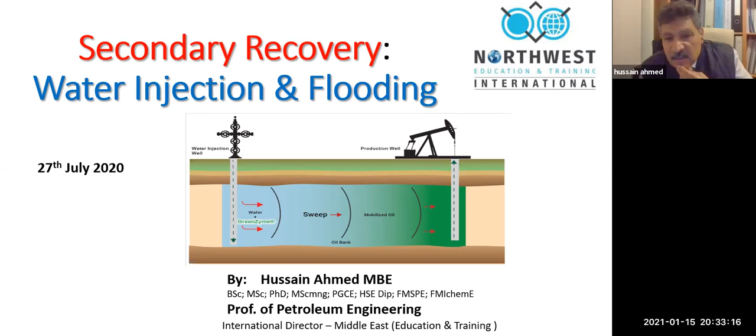Currently, I am also working as a director with a company based in Liverpool in the UK, in the northwest of England. We also do training and education for petroleum and oil companies.

In my agenda, I will cover the following topics: the difference between water injection and water flooding, what do they mean, and why do we need water injection? And if we know why, the next question is when can we do it, at what stage of the life of the field do I start? So when and why is important.

Then what's the economy behind it? Is it going to be expensive, costing money? Is it going to be more than the cost of oil itself? That's also going to be answered.

Then what are the major problems I could face in water injection or flooding, whether these problems could be surface problems or subsurface problems? What are they? I'm going to talk about some of them. I put today about 10 problems, and I'm going to talk about them.

Then we come to a conclusion and recommendations for any future projects on water injection. Hopefully I finish within 1 hour, then I leave the stage for you to keep asking me questions, the question and answer. So that's the plan or agenda for this master class, I call it master class, a free webinar.

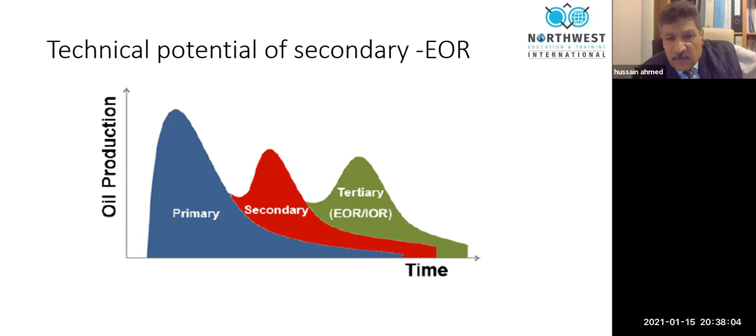So when do we do it? Usually, we do it in order to maintain the pressure we have lost from the reservoir. And also we do it because we want to get more oil production, because the water will help me in mobilizing the residual oil. I got oil. There's oil in the rocks, but the oil is stuck to the rocks, cannot move. So can I wash it? Can I displace it? The answer is yes. How do you do that? You do water injection. So that's an example.

Or there is also an oil which is not swept very well. The oil is a bit sticky. We call sometimes the oil wet reservoir or oil wettability reservoir, hydrocarbon wettability reservoir. A reservoir which likes and loves to keep the oil in it. I need to take the oil out of it. So water injection can help as well.

So these are the reasons. Pressure being dropped. I have not much pressure. I have not much production. I have oil that is not mobilized. I need to move it. I have oil which is stuck to the rocks. I need to wash it, to take it out.

So remember, these are the reasons. Pressure low. I have oil left behind. The oil is immobile. I want to make it mobile. The oil is sticky. I need to sweep it out. Sweep بالعربي يكنس.

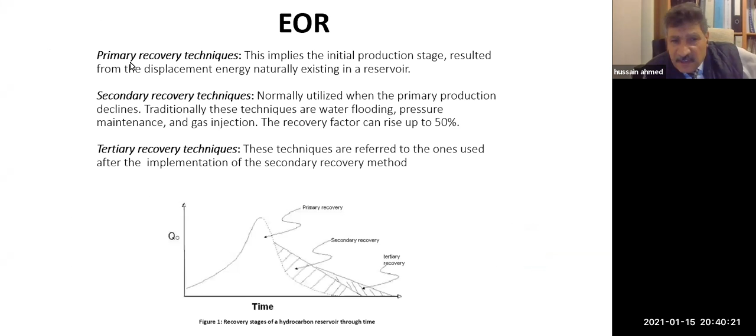So we have these three titles, as I said, primary, secondary, tertiary, and I will explain them. And secondary, already I mentioned what is secondary. Now, if somebody asks you, what is secondary recovery? Tell him it's a process that we use in order to increase productivity of oil reservoir. How? By increasing the pressure of the reservoir. How do you do it? By water injection. So that's the idea. Secondary recovery, water injection is one of them. So this is the answer I put here.

Why? Why? So the answer in a brown color. Pressure restoration and pressure maintenance. My asset, my bank account, my money is the pressure. If I lose the pressure from the reservoir, I will lose the production from the reservoir. If the pressure in the reservoir is very small, then I don't produce anything.

If the pressure in the reservoir is equal to PWF, the well flow pressure, then no oil will be produced naturally. I lose it. So pressure is very important to be maintained. If we lose it, then water injection is the answer by pressure restoration and also maintaining the pressure. So that's one of the aims, maintaining the pressure.

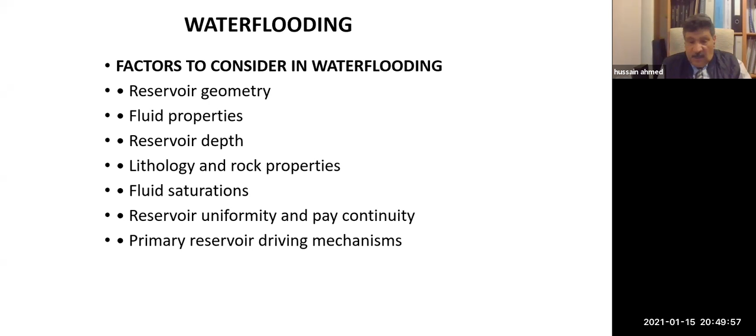Optimum, to make it better in terms of quality. Optimization: how can you do the job at a low cost, high quality, minimum problems? Optimization, you do the work at a low cost, high quality, low or minimum safety issues or mistakes, in other words. So it is also important to think about them when you are building water injection or water flooding projects.

So you think about the oil recovery, how much I will recover, anticipating how much I'm going to recover, maybe 25%. Usually, if you ask me, if I have a fully successful water flooding or water injection project, how much can I recover? The answer, you can recover between 15 to 20% of oil in place. One fifth of the oil, 20%, you are lucky if you can get it out. And sometimes maybe 23%, which is not bad. Very good, actually, money-wise.

Again, production rate, how much? The investment, how much? All these you should ask. Cost of water, also important. Economy is important. Is water cheap? The answer, no. The water is not cheap. Water sometimes costs me a lot. And this is important to consider in this case.

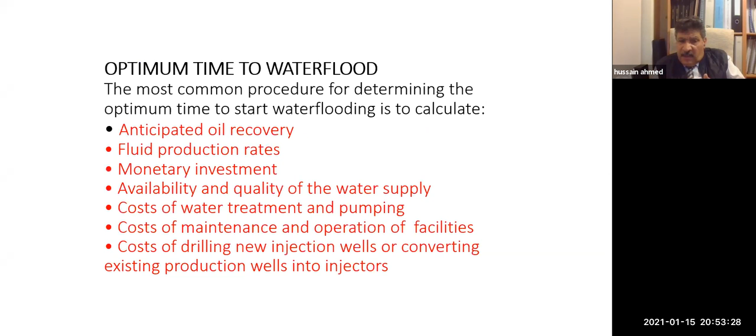The same points are here, but I very much concentrate here on the importance that if the pressure of the reservoir is depleted to a small value, then it is recommended to have water flooding or water injection. Remember that. So water injection is important and useful if your aim is to build up the pressure of the reservoir. These I already mentioned, so I pass.

I already mentioned these. Remember, I repeat in my slides, even in the university. I teach MSc students at the moment, and I repeat things for them in order to remember, not to forget. So remember that water injection is important to think about building up the pressure of the reservoir, number one, and number two, to sweep the oil out of the rocks. Building pressure is more clear in injection, and the sweep is more clear in water flooding.

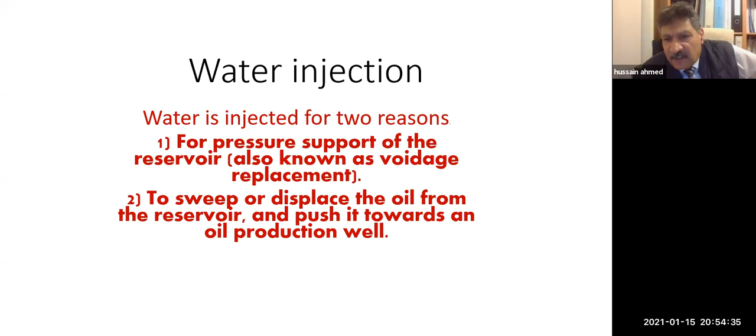Do we have some disadvantages? Do we have some challenges? Yes, some of them could be surface, some could be subsurface. We call them a problem in this case. For example, in the subsurface issue, in certain cases we call it ion exchange, or we call it precipitation. Precipitation, salt deposits, precipitate.

So if I have salt in my reservoir, such as calcium or magnesium ions, and I inject water with other calcium or magnesium ions, I could have a problem of precipitation. Or vice versa: I have sodium and I'm injecting calcium, there could be an ion exchange. Is it very big? Not very big, but something you need to keep in mind.

That could also cause what in English we call a scale problem, scale deposits, and those deposits give me formation damage. Remember the word skin factor? If you have studied petroleum, you heard about skin factor. Skin factor comes from formation damage, and one of the reasons for formation damage is scale buildup. What do you mean by scale? I mean calcium and magnesium ions building up. So keep that in mind.

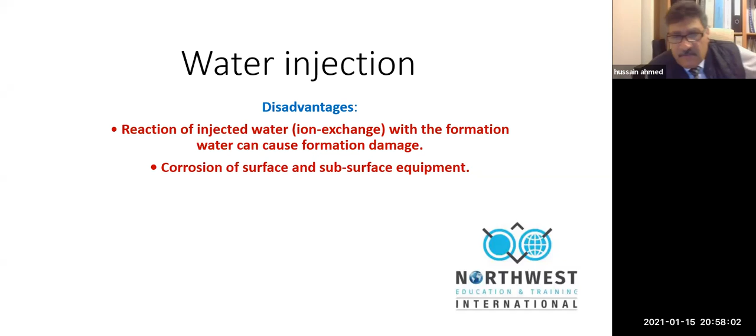So water flooding, water injection, and the purpose, we know it. I have shown you these two slides as well, and the importance of pressure buildup. The pressure of the reservoir is important to keep an eye on. Your injection pressure must be a bit higher than the reservoir pressure. How much higher? They said around 200 to 300 psi. Your injection pressure should be 300 psi more than the reservoir pressure to make it successful and to move the water inside the rocks.

This example is from Saudi Arabia, KSA, the Ghawar oil field. If you heard about Ghawar, this is the largest oil field in the world, a very large limestone field, more than 230 kilometers in length. And they have, you see here, about 4 injection stations inside that reservoir. Khurais also has one. They have one in Shaybah as well, down in the Rub al-Khali.

And they take seawater from the Gulf. This is Bahrain. They take the water from the Gulf, from an area called Qurayyah. Very powerful pumps. I have visited the place two or three times. A huge pipeline, about 54-inch diameter, very big, more than 500 kilometers, pumping the water into the reservoir.

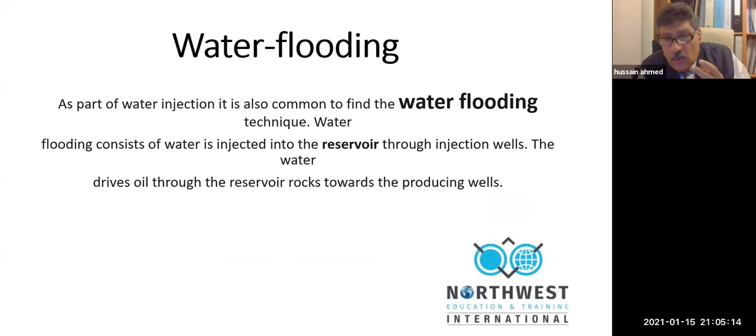The other important factor in water movement inside the rocks, especially in flooding, is mobility ratio, which is faster. If I inject water here, what do I need? Do I need the oil to move fast or the water to move faster? I want the oil to move fast and the water to move slowly. So mobility, the speed of moving, gives the mobility ratio. Which one is faster? Usually, mobility ratio should sometimes be less than 1 to make a good sweeping. Other things you need to be aware of are the displacement efficiency as well as the permeability.

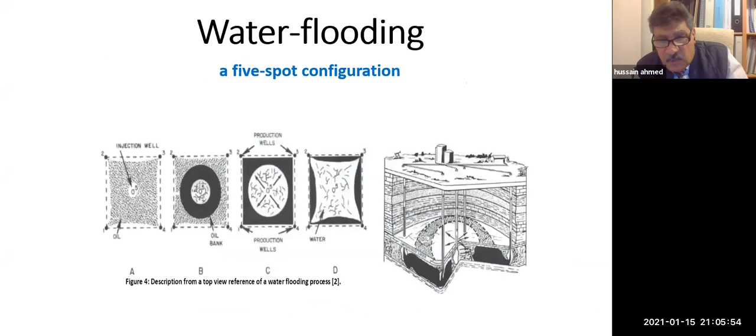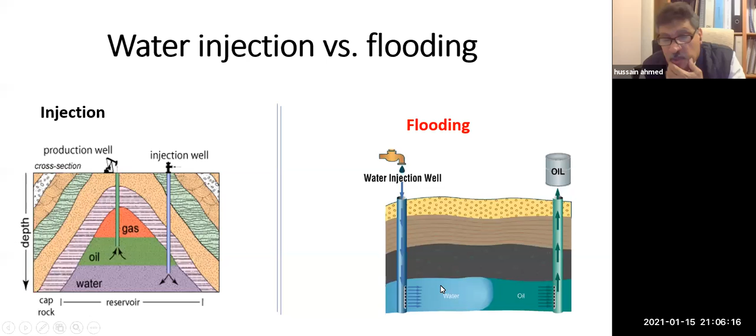If I discuss with you water injection in this diagram here, I prefer vertical permeability to make the water go up. But here I prefer horizontal permeability to sweep the oil. So understanding the permeability direction and permeability amount, how many millidarcy, is also an important factor for better planning of water flooding. And mobility ratio also has a connection with permeability, which we call relative permeability. So remember these.

If you ask yourself, what do I need to know about water injection, especially the reservoir? Permeability is important. Viscosity of water and viscosity of oil is important. The pressure of the reservoir is important. Injection pressure is important. The quality of the water: if the water is not clean enough, it will cause blockage, damage. So the water should be clean enough. This also shows the importance of mobility ratio. I may get better movement, better sweeping, at a low mobility ratio.

If the water moves very fast, then I have a breakthrough. Breakthrough means the water escaping, leaving the oil behind. Not good. Is it good to have a big breakthrough? The answer is no. Is it good to have an early breakthrough? The answer is no. I don't like it. A breakthrough means we are losing the water. The water does not do the job.

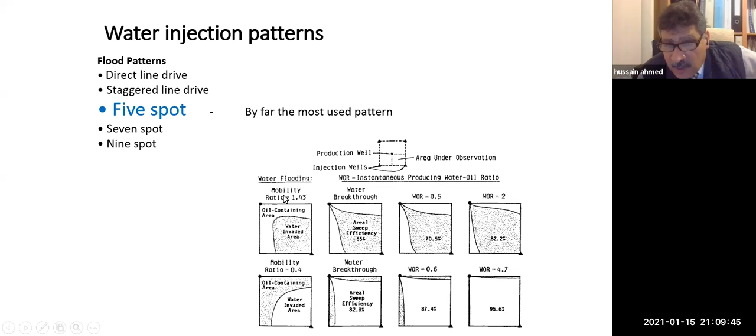What does it mean? I have recovered, or I swept, only 65%, but here I swept 82%. Why? Because my mobility ratio is small, 0.4. But with a high mobility ratio, I sweep less. So the lower the mobility ratio, the better the sweep efficiency.

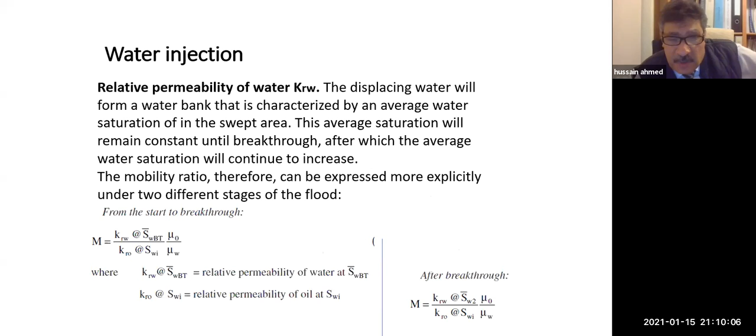How can I make the mobility ratio lower? Some people say add some chemicals, gelatin, polymers to the water. Sometimes you add something to the water to make it jelly. And that's also important to look into.

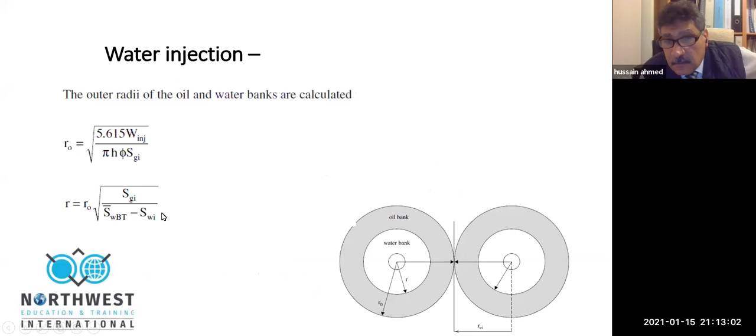This is the way you calculate RO. For example, here you have RO. What is RO? The outer radius of the oil bank. How can I calculate RO? This is the equation we use to calculate RO. You got the point? So it's quite important you be able to do that if you wish. And that's useful to be aware of.

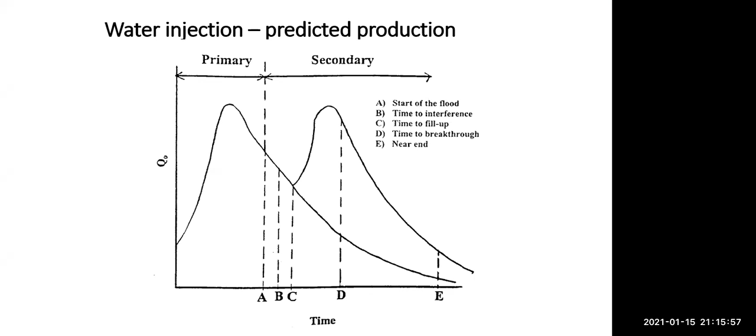Sorry, Yamama. Hello doctor, somebody asked me on WhatsApp, she cannot attend because she needs to do registration, or maybe no need for registration. I'm not sure about that, but we are just opening the Zoom, so I could receive any attendance. She may consider to recheck her passcode, I gave her the passcode, sorry for this. She could join us on Facebook. On Facebook, huh? Yeah, do you need the link to it? I could post it, no, I have no time now to talk to her, but she tried and she apologized, but I will talk to her later. She's from India.

So we have this case of primary recovery, secondary recovery, and the peak value of it, these are important to take into consideration. So it's a fact that secondary recovery has a life, a starting point and finishing point. This graph tells you between point C until point E. After that, we have to stop and think about something else. And these stages of water injection, stage A and B, A, B, C, D, and E, which is exactly the same as here, A, B, C, D, A, E.

The stages tell us that in first stage, you're just building the pressure, filling the gap, replacing the oil you produce with water. Stage B, now you have some interference, tadakhul, between the water and oil as it starts to sweep. Stage C, you are filling up the gap. D is a breakthrough. And in E, you have the end of the project, where you have too much water coming out.

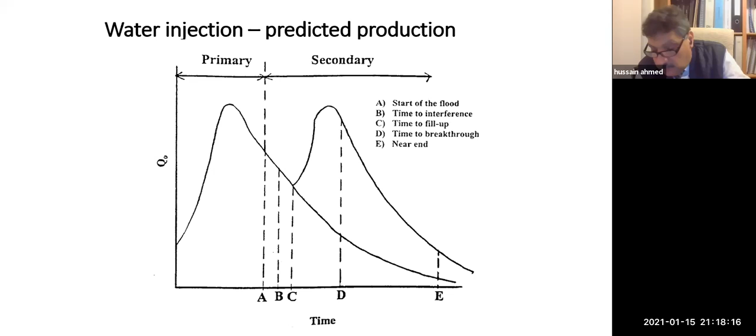So these are the important words in water injection and flooding as well: the breakthrough, at and after. The breakthrough is the beginning of the water produced to the surface, the beginning of the end of the project, bidayat nihayat al-mashroo, the breakthrough - that's breakthrough number 2. In number 3, after breakthrough, you have to consider the water production rate, keep an eye on how much water is coming, and you will ask yourself when I will stop for good. In point number 1, before breakthrough, you will keep an eye on how much oil I'm producing, the water cut to be a small value, and monitor the pressure build up as well.

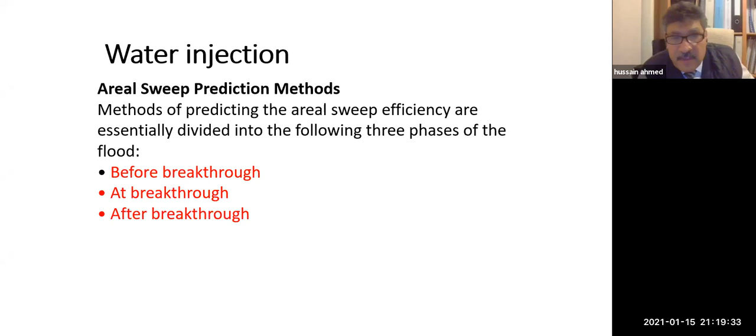So these are important stages in anything you need to be aware about. I put for you here some equations to consider. I'm not going to do any calculation with you today because this is a master class, not a teaching class, just for training. But if I were teaching, I would talk about how we can calculate the sweep efficiency, areal sweep efficiency, and also the breakthrough time, before and after. So these are the equations here.

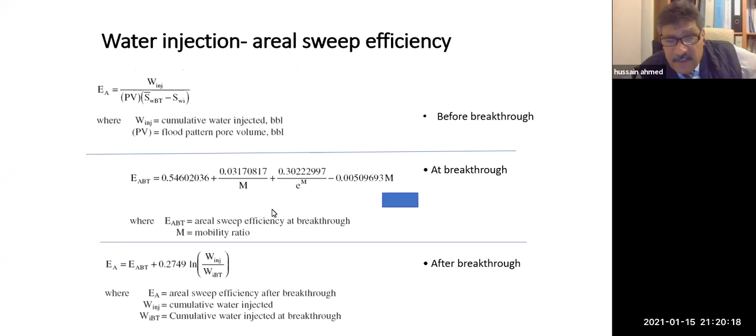So with this, you can mathematically calculate how much is being swept, 20%, 60%, 80% areal, that depends on your data. There's also a calculation for the vertical - this is aerial, also vertical sweeping. Vertical must mean water moves upward, and that also has a certain calculation for it. I will not show the equation here, but I'm just saying that some calculations are important in designing water flooding and water injection, which you need to be aware about.

I don't teach calculation here now. I know the calculations, I have done it with my MSc students, but for you, there's no time to do that.

What's the difference between sweep and displace? Sweeping is removing the oil from the rocks, regardless of what I put behind it, maybe nothing, just remove it. But if I leave some water behind, that's displacement efficiency. I push the oil because the water wants to take its place in the pore volume. I have oil in the pore volume, I push it out, and I put water in its place - that's called displacement efficiency. Both sweeping and displacement can work together sometimes, and if you multiply them together, you get something called recovery factor.

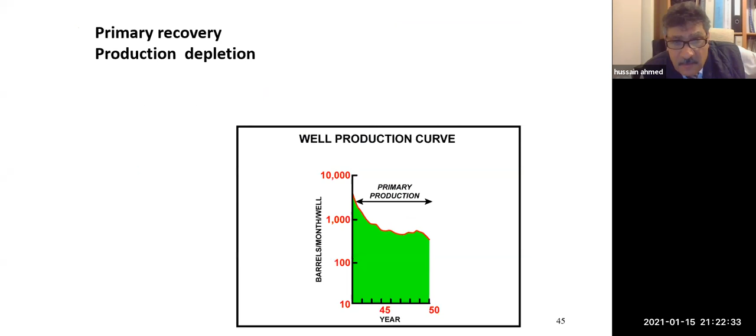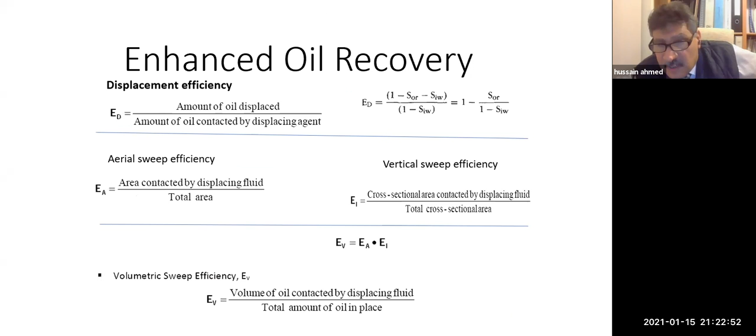Enhanced oil recovery. Sweeping efficiency, aerial or vertical, depends very much on porosity, permeability, heterogeneity, and other factors like that. We have mentioned this slide earlier about the fingering issue.

When I have heterogeneity, not uniform, I may lose good sweeping. To improve sweep efficiency, I may add some polymer to the water. Can I? If somebody asks, I'm doing water injection in Halfaya, or in Ghawar, or in Rawdatain oil field - can I add something to my water? The answer is yes. What do I add? You can add polymer, water-based polymer, aqua polymer, or you can add surfactant - sabun, sa'il, soap. These will help in reducing the problem of fingering and give me better sweeping efficiency. So I can improve efficiency by adding chemicals to my water - polymer or surfactant - in order to make it a bit jelly.

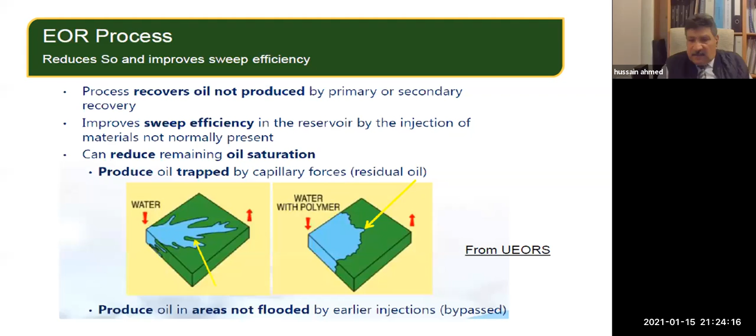The oil field depends on the API factor. We won't talk about this polymer in detail - I'll just mention it quickly. These are polymer and surfactant, which we name as tertiary recovery. Thermal recovery is also tertiary.

Usually secondary recovery, as I said, water injection or gas injection can take 20-30% maximum. But from my experience in the oil industry, if you get 20% recovery, you are lucky. So water injection can recover up to 20% of the oil originally in place.

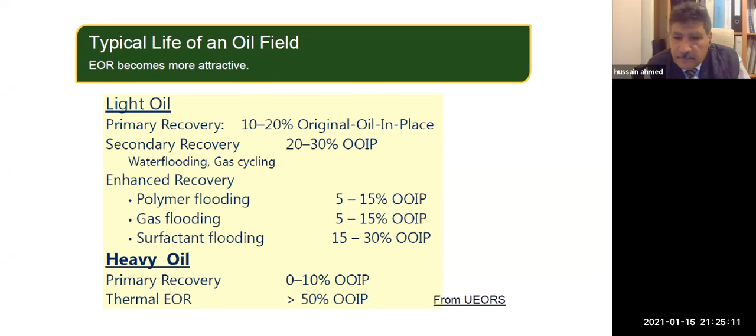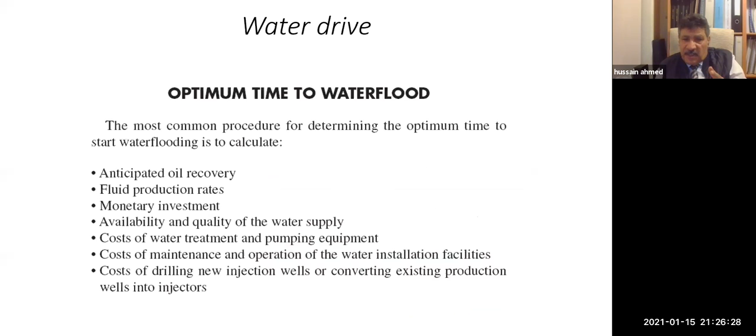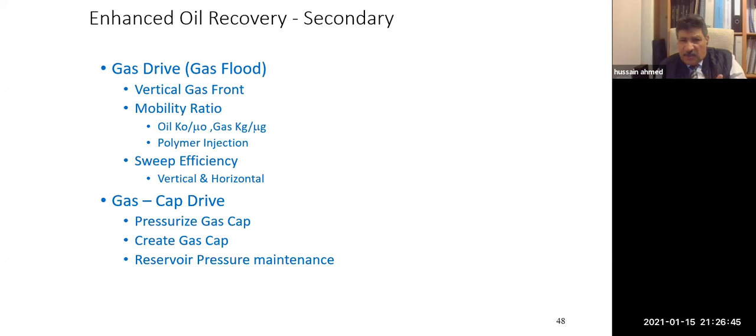We mentioned the optimization already, and here is the difference in driving mechanism, whether it is gas-driven or water-driven. I prefer water injection and water flooding to be in a water-driven mechanism to give me more power.

Other parameters you need to think about your reservoir in terms of capillary pressure, the surface forces, the interfacial, surface tension, called wettability, and adhesivity.

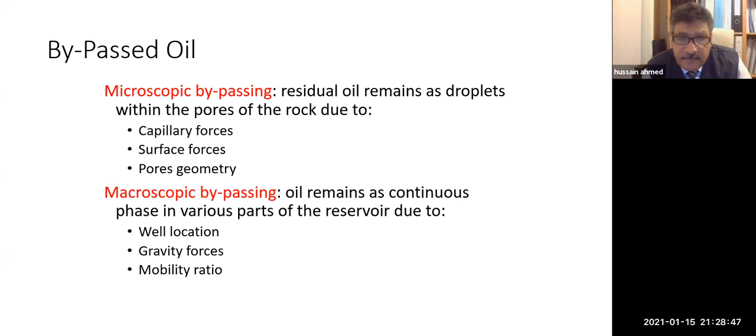Water injection, I already mentioned that to you. I mentioned the water injected oils already. Costing and economics, I mentioned this because I'm worried about time. Don't forget the importance of understanding the cost of a project, how much I produce out, how much I spend money for the surface and subsurface. That's important. Mobility ratio, I have mentioned them. Injection rate is mentioned.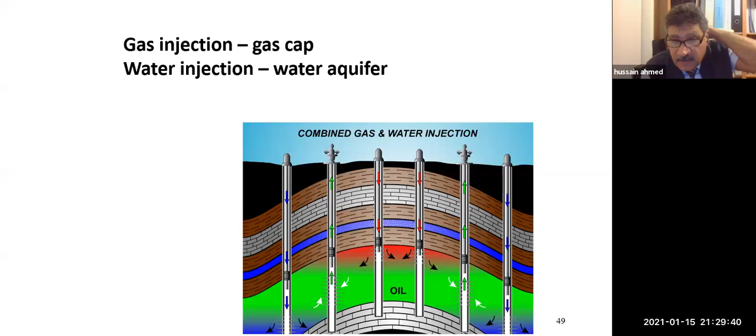And these are important to look into: how long, what's the distance between the injector and the producer? If I go to the slide, here we are. I have the injector, the blue one, and a producer in green. This distance from here to here, how long is it? They name it spacing, well spacing.

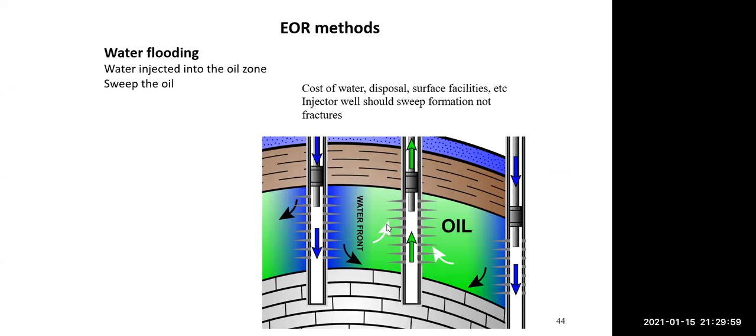And if I know the L and I know my injection rate, I will know my T, the time, the breakthrough time, how long it takes for the water to move from the injector to the producer. How many days do I need for this water to move from the injector to the producer? 10 days? 40 days? 300 days? That's what I name in reservoir engineering, in water injection, the TBT, the time of breakthrough.

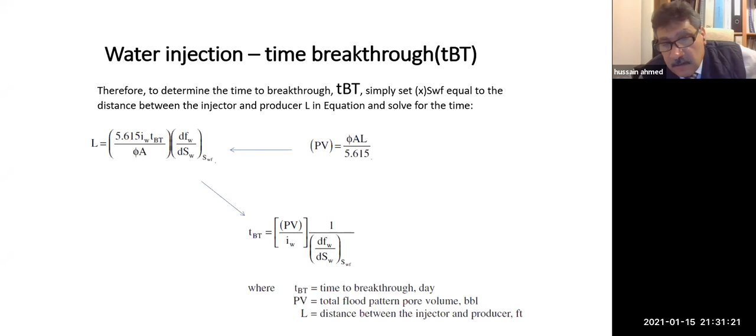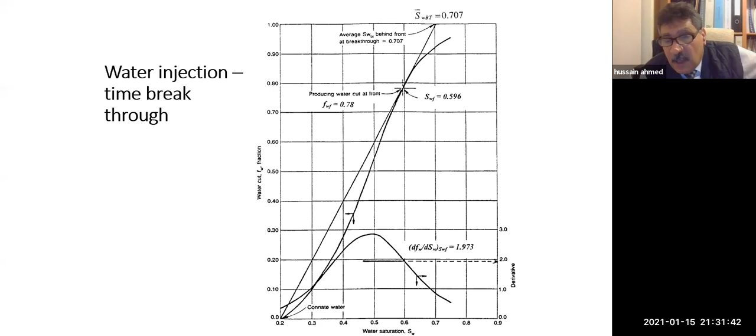Typical time should be 400 days, 440 days, 1 year. That's better, don't make it short - short, you lose your money. And this graph also does correction or calculation for the saturation, water saturation. We start with small water saturation, but the saturation builds up until you reach the peak value. And I need to know, in this case, how much the water front is as a ratio.

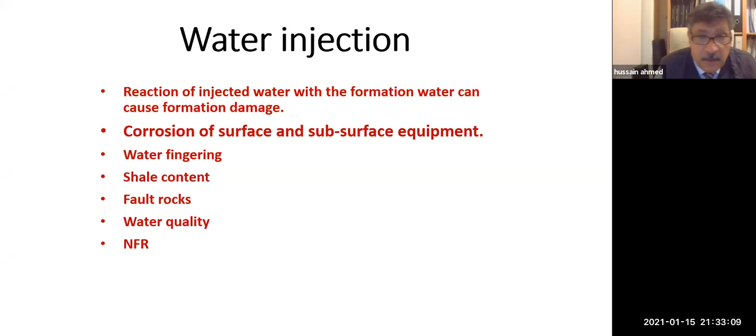It's okay, take your time.

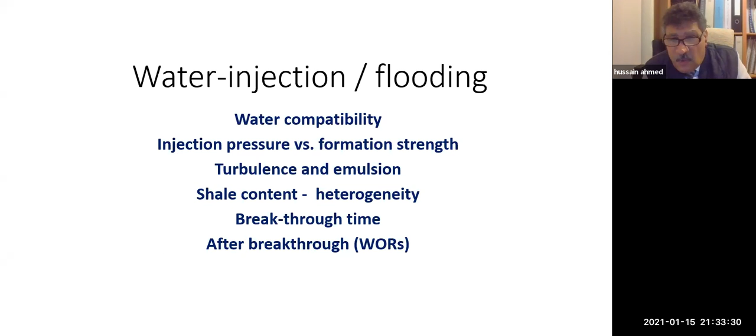So we have these issues to look into as well: injection pressure we mentioned, turbulency and emulsion. You need to understand that in research, because if the water is turbulent inside the reservoir, then you get emulsion - water mixed with oil, and you get an emulsion that's difficult to separate. Shale content, breakthrough, and water-oil ratio.

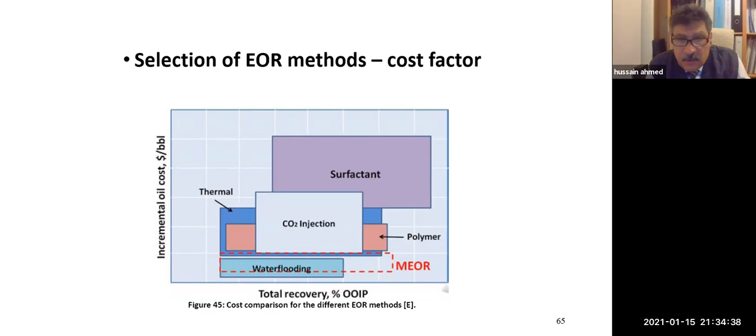The water flooding, what do I name it? I name it secondary recovery. The surfactant, what do I name it? I name it tertiary recovery. So surfactant comes after water. In between them, we have CO2 injection or flooding, polymer, thermal for heavy oil, and MEOR, which stands for microbial enhanced oil recovery - they use microbes and bacteria to recover the oil. These are important to keep in mind.

I finished my lecture. I've got 2 minutes to show you a small animation, a YouTube animation, and then I will give time for questions, if you don't mind.

It's okay, take your time.

So I will show you the animation, and I hope it works. Inshallah. So we have to go to share. Where is my diagram? No, he's here.

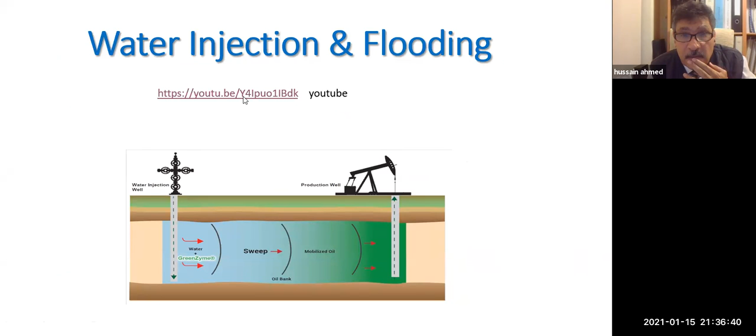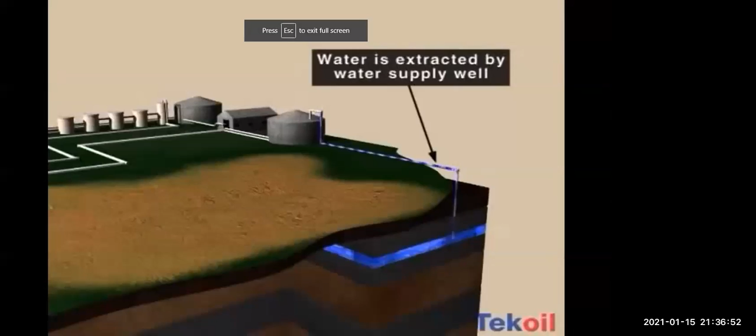Okay, just one second. I'm just learning my technology, my IT. It's okay. My computer is playing games. Something wrong with my computer? No, it's okay. You could go to share from Zoom. I have something coming on my screen which is disturbing me. Okay, take your time. Okay, I need to get a new share. I think I'm going to share it now. Are you seeing it? Yes, we do. It's an animation anyway. Yep, we do.

Okay. So in this animation, he tried to show the water injection process. First of all, he takes the water from groundwater, the blue line, natural water. He will put it into a tank on the surface, used for treating the water; we call it the supply tank. The water comes to a settling tank to remove any sand particles. They treat it to kill bacteria, and then they pump it from the surface down into this well. This is the injecting well. This is the 5-spot technique: one in the middle is the injector, and 4 wells in the corners are producers.

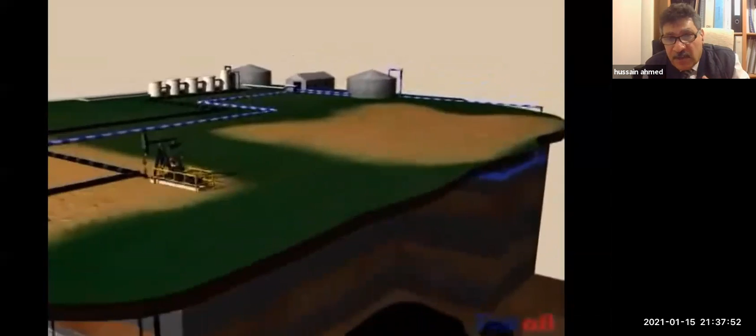That's a 5-spot technique. So you have the water supply, groundwater, put in the tank, treat the water, make it clean, pump station, pump it in a pipeline inside the reservoir through the center point, and you have 4 producers surrounding. The water will remain inside, you see the blue area, and the oil will be produced. The black is the pipeline of the oil. And you see this blue area is growing. We call it sweeping efficiency, by displacing the oil and bringing the water in its place.

Okay. I think you stopped the sharing because you are not a host or co-host. So if Ali hears me, please raise Prof. Hussain Ahmed to be a co-host with us. Yes, I will. Thank you. Sorry about this. No worries. I wait to be a co-host so I can bring my slides to you. Yeah, we didn't give permission for you. Okay, I think I am now. I'm sharing now. You see the slide? Yeah, we do.

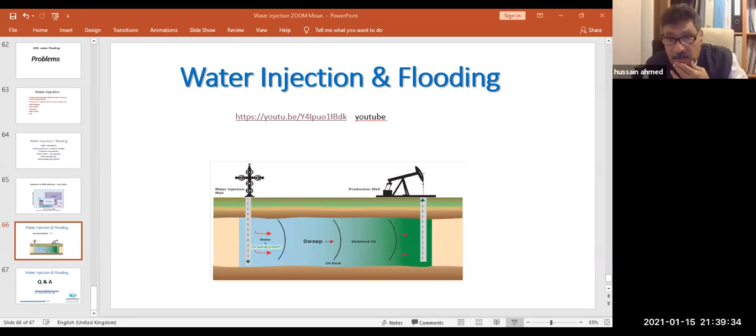Okay, so that was the little animation I mentioned to you, and now I'm opening the session for any question and answer you want. I thank you very much for listening. I have taken about 9 minutes extra from my lecture time. So you have about half an hour now to question me if you wish.

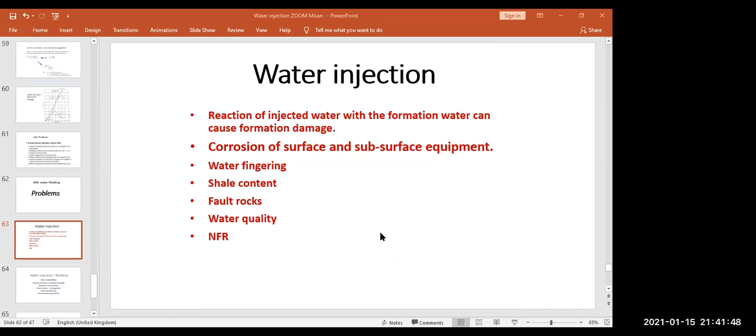And the third question, I think you were working at Rumaila Oilfield. I'm in Rumaila Oilfield. So for the water injection, they're using just straight line water injection wells. Is this strange or is it normal?

Okay, thank you, Ali. For question number one, regarding can I use how much oil in place as an indication for how much water I inject? The answer is yes, you can. We call it a rule of thumb. You say, for every barrel of oil in place, I will inject 2 barrels of water. So if I have 1 million barrels in place, I will inject 2 million barrels of water. It's not accurate, but it gives you a rough idea.

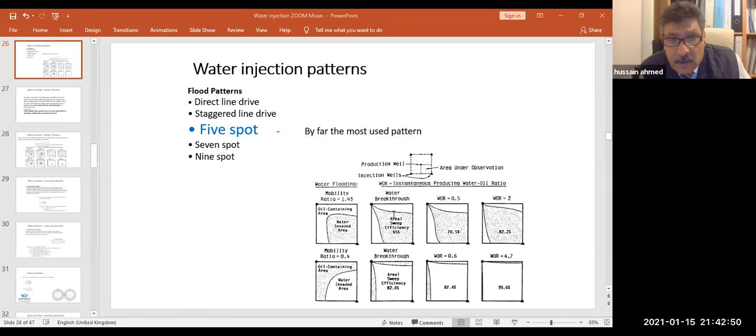But of course, the most accurate amount is taken from the equation I showed you, which you can use to calculate. I'm looking for it, and that is useful to consider. But the answer is yes, you can use this water cumulative equation, or you can use how much oil in place, or you can use a production rate.

If you say, I produce 100,000 barrels of oil per day, so let me inject 200,000 barrels of water. You can also do this one, either cumulative or daily production, as a rule of thumb. You are using 2 barrels, not 1 barrel: one is for displacement and the other one is for sweeping, especially in flooding.

In terms of Rumaila, they use the line pattern, nothing wrong with that as well. Line pattern is usually used in old oil fields, mature oil fields. The 5-spot is good for an almost brand new reservoir.

And the other question you asked me about low salinity water, yes. Low salinity water is recommended because it gives you a better sweeping efficiency. But if you don't have it, then use seawater or formation water. I prefer to use low salinity water to get more sweeping.

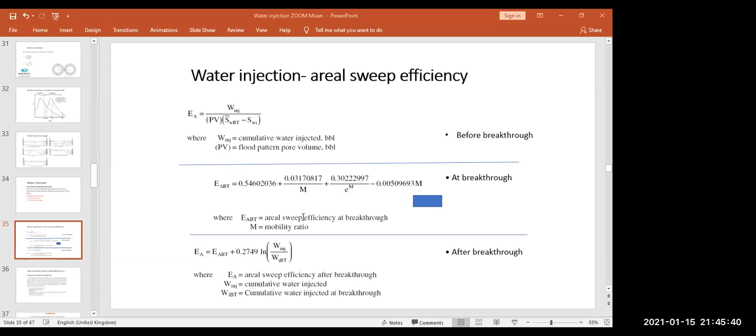As you mentioned earlier in the lecture, the equation to calculate the time to breakthrough. So my question is, in which way could calculating time to breakthrough help us? Knowing the value of time to breakthrough tells you exactly the length of the project, how many years this project will continue, and that's the importance of knowing the time to breakthrough.

So it helps you in terms of predicting the life of the project, as well as telling you how much water you will inject. For example, I'm injecting 1,000 barrels of water per day. If I know my breakthrough time is 400 days, 400 multiplied by 1,000, I need to use 400,000 barrels. So it's useful for the life of the project, and it's an indication of how much water you need to inject, if you know the injection rate.

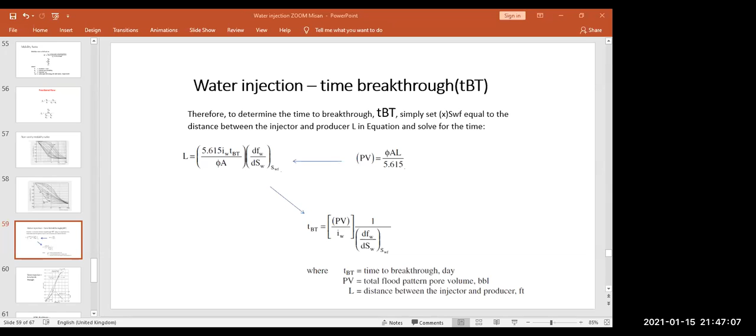Okay, thanks, Doctor. My second question is, if we have a highly permeable reservoir, how can we perform a water flooding project in these reservoirs? Yeah, this is a good question. One of the problems in water flooding is high permeability. Very high permeability can give you a fingering issue and an early breakthrough. The water will run very fast through the rocks and leave the oil behind, and that is something we don't like.

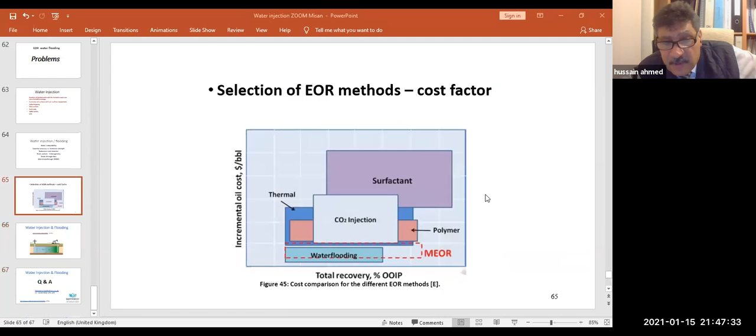So I add not very much. You add a half kilogram of polymer powder to every barrel of water.

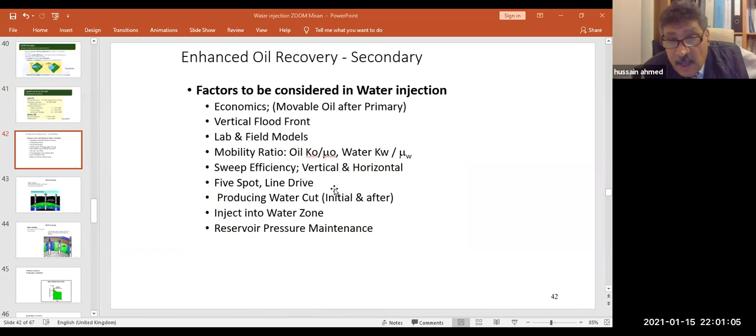But if I have fingering, if I have heterogeneity, that means change in permeability, I have fractures, I will call it unstable. Very simple.

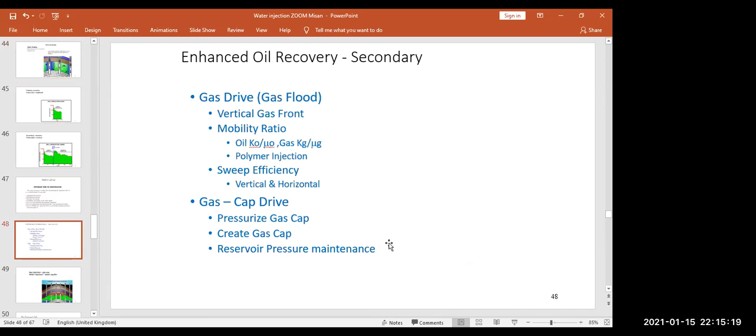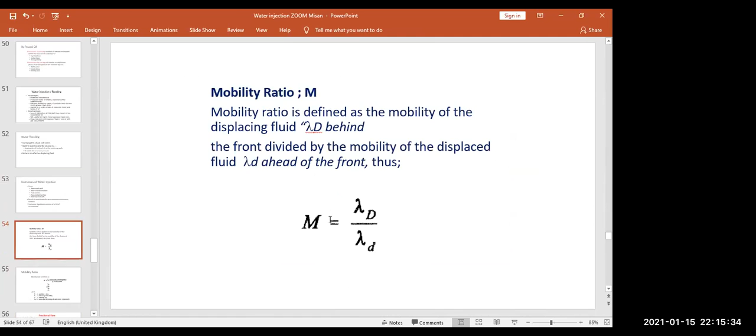Okay, so the other question says, can you please re-explain the difference between sweep and displacement efficiency? You say that displacement is when water displaces the oil and takes its place, but what about sweep? What will take its place?

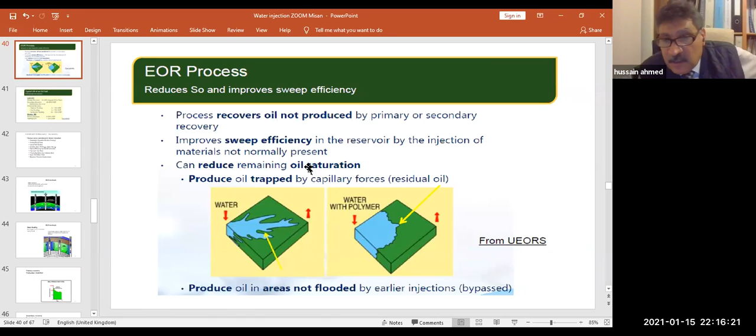Good question. Sweeping is about contact area. The sweeping efficiency is the ratio between the contact area and the total area. For example, in this slide, the total area is the whole block, made of blue and green. If I take the ratio of the blue area to the total area (blue plus green), that's what I call sweep efficiency - the total area being contacted by the water. This is called sweep efficiency, the areal one. But displacement is different.

Displacement is about how many barrels of water you inject to displace how many barrels of oil. So it's the ratio between how much oil produced to how much water injected. For example, I produced 500 barrels of oil, but I injected 600 barrels of water. So the displacement efficiency is 500 over 600. That's a ratio between quantities - amount. But sweep is about area, contact area. That's the difference between quantity and area, the difference between sweeping and displacement.

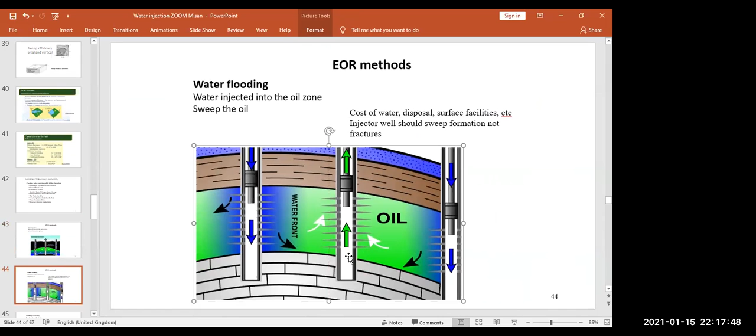I got a question with it - sweep efficiency, does it depend on oil properties? Yes, sweep efficiency very much depends on oil viscosity and oil adhesivity.

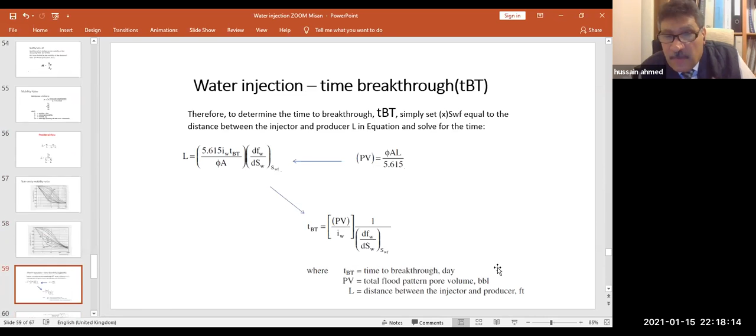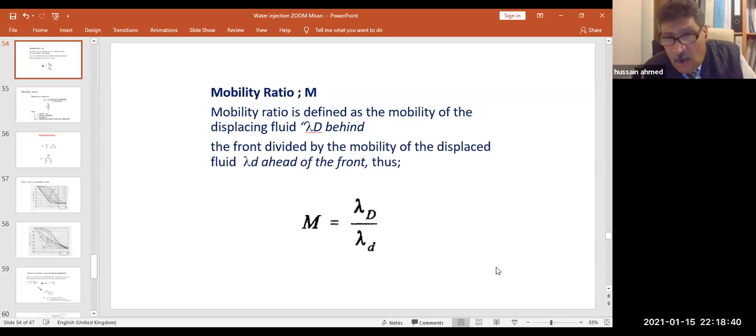If the oil is very viscous, high viscosity, and very adhesive - like tar or pitch - then sweep efficiency will be very low. So sweep efficiency is affected by viscosity and adhesivity. If the oil is very viscous and also very adhesive, then sweeping efficiency will be low. Therefore, sometimes to make sweep efficiency high, they add chemicals to the water - maybe polymer or surfactant, or make it hot water, in order to remove the adhesivity.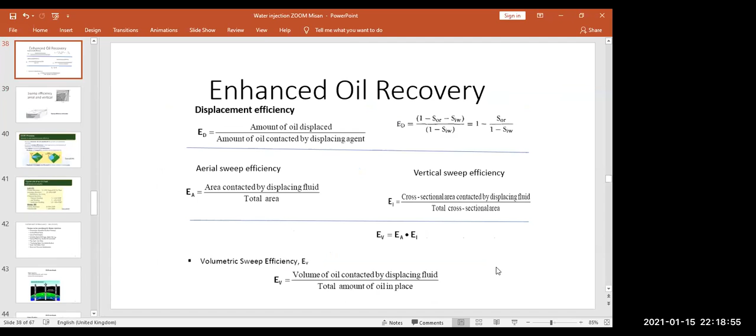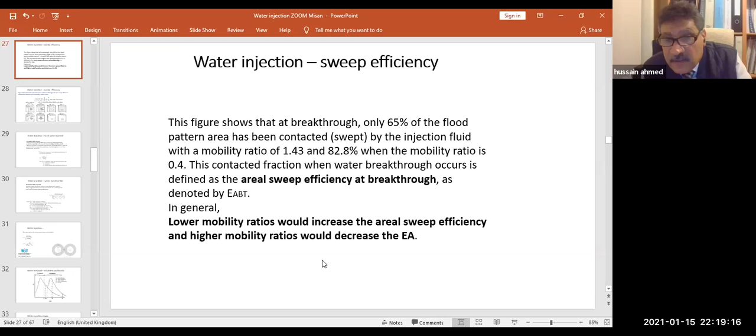So the answer for you is: sweep efficiency depends very much on the viscosity of the oil, in other words mobility ratio. Mobility has a relationship with viscosity. Mobility ratio has a relationship with sweeping efficiency, and we calculate mobility based on the viscosity of oil.

Yeah, I got another question if you're finishing. Yes. When should we stop the water flooding?

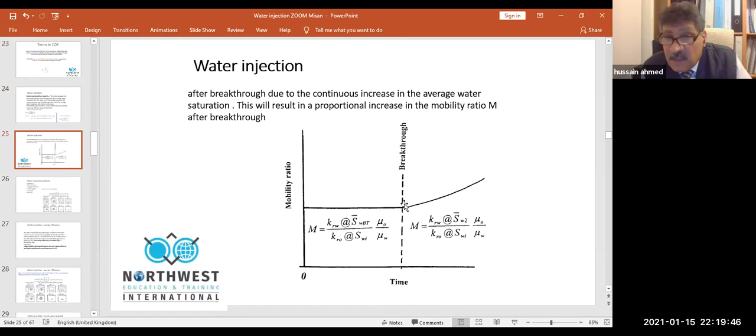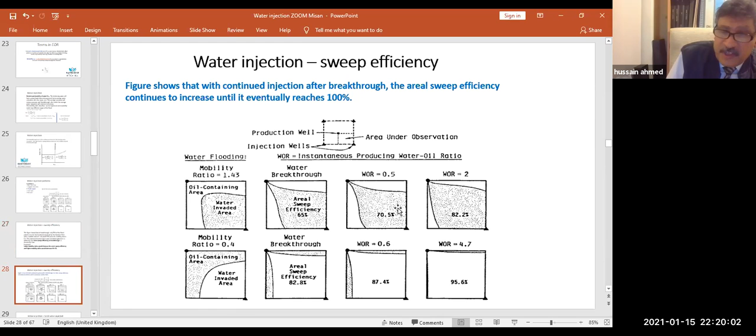We stop the water flooding once we feel that we have a breakthrough, more water coming to the separator. I noticed too much water coming to the surface separator, and that is the beginning of a breakthrough. So if in January I have 10% water saturation, in February 20, in March 30, in April 50, then I would think, oh, too much water is coming.

Yeah, I have another question: is the economic limit of secondary recovery higher than the primary recovery? Okay, recovery...

Secondary recovery is for sure higher cost than primary, because in primary, recovery is natural. That's the only primary mechanism, you don't add anything. The reservoir has its own pressure, and you produce from a natural drive mechanism.

The cost, for example in Iraq, Kuwait, Saudi Arabia, for primary recovery to bring the oil to the surface is no more than maximum $2 per barrel. But once you do secondary recovery, you add another $2, so it becomes $4. Here production costs me $2 per barrel, here it costs me $4 per barrel, because I'm adding new expenses: water treatment, water additives, corrosion inhibitors, pumps, pipelines, and so on. So I'm costing more in this case. Yes, secondary recovery is more expensive.

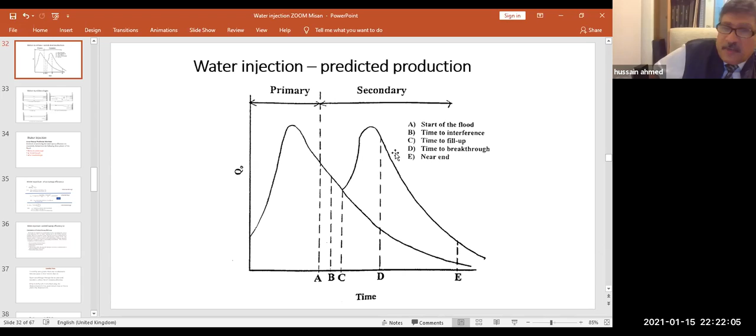Great, I think we're going through the list of questions now. How much does it cost to inject 1 barrel of water in an injection well? How much does it cost me to inject 1 barrel as money? Water injection for 1 barrel?

Of course, there is. I have some calculations, but in different slides, not for you, for my project. It costs - depending on the depth of the reservoir. But on average, as money wise, for water injection, it costs you around 50 cents, half a dollar for every barrel of water you inject, including water treatment.

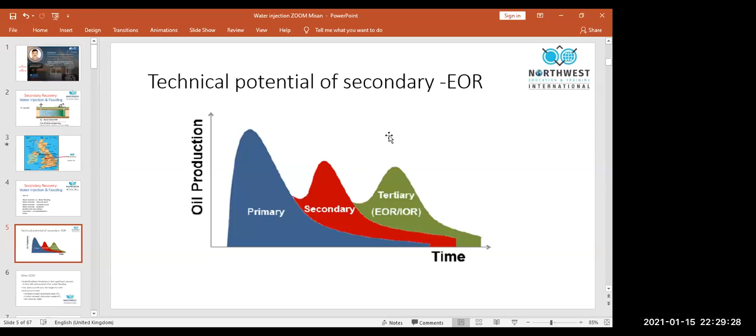Murtadha Turki. How are we dealing with oil-wet rocks? Yes, oil-wet rocks, from the name, the rocks which love to keep the oil stuck to them. So the best way to deal with it, add something to your water. Add a surfactant. ضيف كمية قليلة جدا من الصابون السائل مع الوتر in order to remove that oil from the rocks. That's the answer.